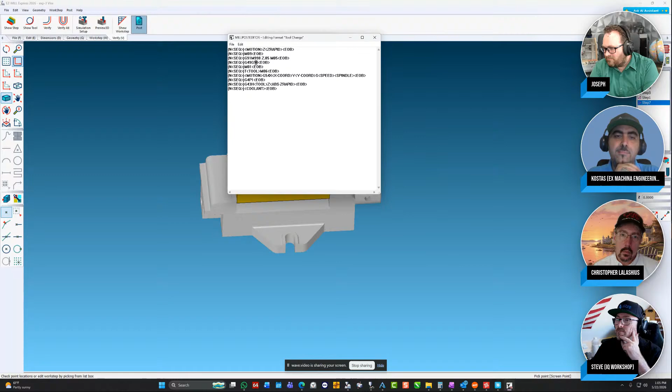Here, we're not seeing a Z issue, but if I go to the tool change format, you can see that we have a positive Z, this M998 is the tool retract. So we're taking that extra 50 thousandths. If I go to the end of the program, that'll be the other location, we're doing the same thing here. Now, had you not known, if you know nothing about post processors, the AI is there for you, where you can just go in here. There's an upload button. So we'll upload the post processor. There's our Tormach AI copy.

And I'm going to say to it, let's see, modify the post where M998 Z, what is it? I got to be exact here. 0.05 should change M998 to Z 0. Now let's see what AI does for us. Doesn't take it long at all.

I probably should have been more exact and said that I wanted that done in the tool change and the program end. But let's see what it does for us. Now, what it's going to do is take that old legacy code and change it over to WinBasic. It does that for us automatically.

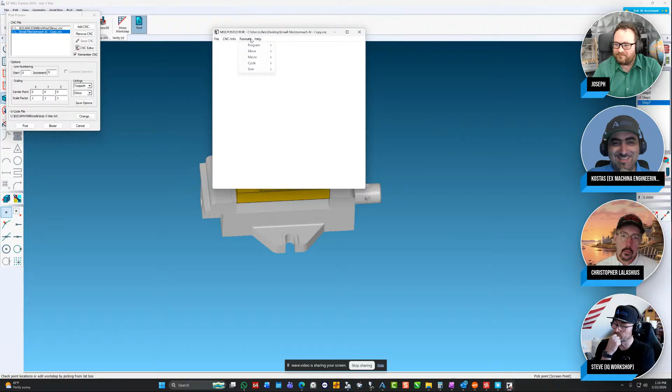WinBasic. So you can imagine trying to write all that code or copying from one post processor to the other. I mean, if you want to modify safety blocks, you have two people sharing the same post to make those changes that are suited for you. I mean, there you have it. You don't have to worry about making a phone call.

Yep. So Chris, can I just ask a question from a hobbyist perspective? Absolutely. So I'm running a GRBL compliant CNC machine, currently covered in what I affectionately like to call man glitter, sawdust. One of the things I have to do every time I run a job is run a G28.1. The reason I need to do that is if I don't, the machine plunges down to a specific depth and then tears off to the start of the job, which might actually be through the stock. So G28.1 just sets a safe travel position. Would I be able to use the function you've just demonstrated to add a G28.1 to all of my jobs so I don't have to do it manually?

Absolutely. You can tell it what kind of code to follow after. So let's say you had your safety block, you could put your safety block in there, and say I want on the next line, this is what I want to insert, the G28.1, and you can do that and tell it to say okay, I want to do it in tool changes, and I want to do it at the end of the program, and it'll go through just like it did.

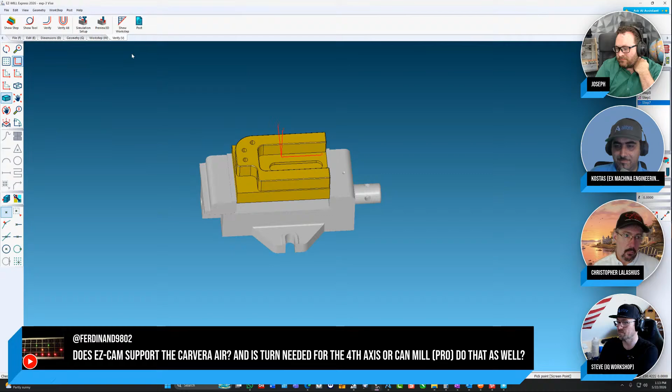Maybe if I step into it real quick here. Let's see, no, open. 4th axis, so here's an interesting example.

So you put this on a 4th axis, and while this is spinning, it's going to be moving in X, Y, and Z. Might take... okay, here we go. Maybe let's simulate that.

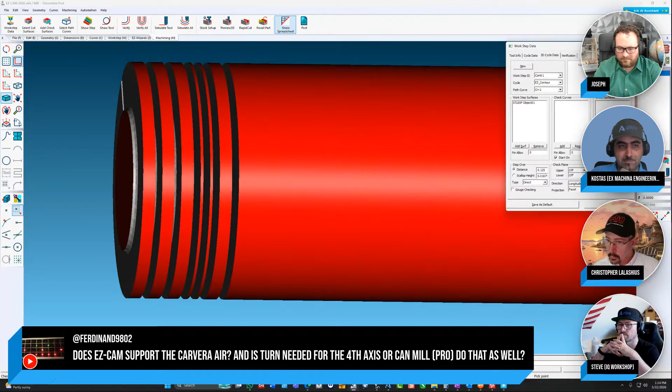Yeah, I keep getting an error. As it always happens with live, because nothing works right, of course. Doesn't it? Happens to me all the time. Right, yeah, why don't I come back to this? While you guys are talking about an Alibre question, I'll iron that out.

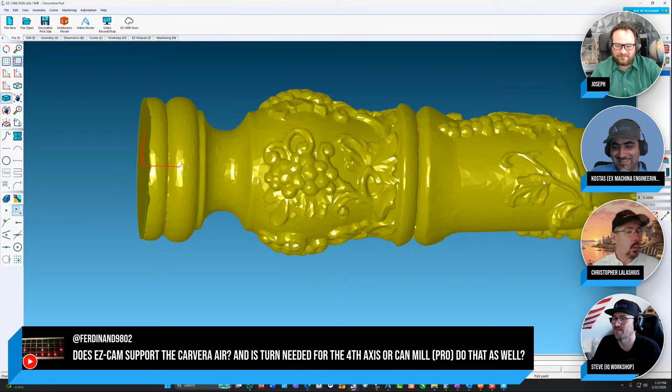We'll nail that, absolutely. Something that we've talked about with Alibre in the past is STEP and SAT files, and I don't know if I actually gave that the depth that I should have. So I think it's important to unpack why these are different formats and what a big difference it makes. When you have a model in your computer, no matter what parametric platform you are using, if you convert to STEP, there is a substantial change. The STEP says, I want to store all of the geometry or the shape of the file.

Your computer, on the other hand, your Alibre or whatever platform you're using, actually represents these surfaces using something called NURBS, or analytical surfaces. NURBS surfaces, imagine splines, point splines that you can make. In fact, I'll pull this up on my computer. NURBS is a really fun way to talk.

You think NURBS, kind of a funny word. But if we make a spline like this, I have all of these control points that determine the shape of the spline. Imagine those in 3 dimensions, and that is how organic geometry is represented. So your computer has a bunch of these in the background that you don't see that represents these surfaces.

When you convert to STEP, these splines are lost and just the shape of the surface is recorded. When you open it up in a new platform, the new platform reads the geometry and recreates these splines. It's a process called reparameterization. Sometimes, especially between different kernels, this reparameterization can cause tiny errors in edges and things like that, and that's where you can get some import errors.

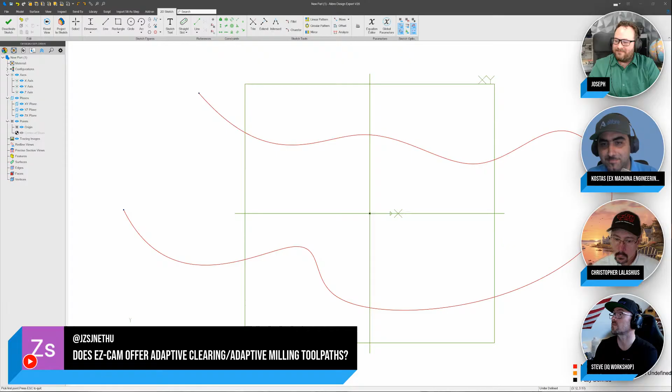Okay, can I just add a couple of things? First of all, I want to highlight this because it's a really quick answer. The answer is yes, it does - I've used it. The question was, does EZ-CAM have adaptive roughing and finishing, well, adaptive roughing, because that's only used for roughing. But yeah, it does have adaptive roughing. I just wanted to add to that.

So NURBS, it's not a slur for somebody who's just started playing the video game you love, right? It actually is initials for non-uniform rational B-splines. I think I got it.

Yep, and they were developed by Renault in France, right? And they're called Bezier curves because the mathematician that defined them mathematically for the first time was called, his last name was Bezier - Pierre Bezier or something. But the really funny thing is, Renault invented this, and the first car they designed using NURBS was the Renault 19. Now go on Google and find a picture of that car.

It's a square box. So I don't know why they went into all that trouble - a square box invented with NURB fillet curves. Yeah, well, yes, it does have a couple of fillets. That's very true, especially the 16 valve one, which is quite an exciting car to drive, but it still is a square box. So they went to all that trouble to design a slightly less square box. There you go, fun fact for you. I love it, I love it.

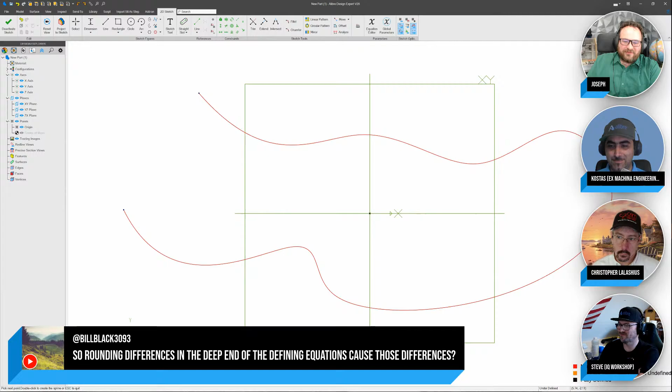That is one thing, yes absolutely. When you're dealing with NURBS, different kernels are going to define splines differently, so you can have the same geometry represented with very different looking splines depending on how the given computational kernel processes that. We think of them as geometry kernels, but their geometry is almost secondary when you think they're defining topology, maintaining consistency across different nodes, constraint graphs, geometric computations - all of that happens before the geometry, so it's almost secondary. There's a lot that can cause these errors. Another thing is when you go into surfacing, you have a patchwork of different individual faces being knitted together, so small rounding differences compound across these relationships sometimes. That's a big factor as well. Hopefully that's kind of an answer, and a lot of it depends on the specific case and situation.

Yeah, and look, NURBS is a really weird thing in mathematics. If you go into the math definition of it, it's a function where, if I remember correctly, the tangent to the curve at every point is defined by three control points: the one you're closest to, the previous one, and the next one. So it is a bit weird, and I imagine different geometric kernels have different commands and entire algorithms and strategies to decipher that and actually design the curve. So it's also a porting issue - when you want to take one set of commands that maybe ACIS uses and port it over to do the same thing with a different command set that Parasolid uses, that's another issue for translation problems.

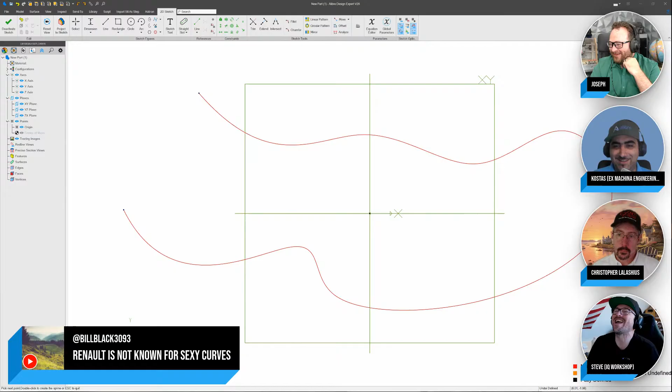Love it, yep I like that too. I think this one might be for you, Costas. Yeah, well, they're not known for sexy curves - they're known for being sexy around the curves because, come on, they're great cars, really fun cars to drive. And the good thing with Renaults when you drive them is you don't have to look at them on the outside, which is a major plus.

And we have another question. Oh, math is fun, got to throw that one in. It is, math is fun. Yep.

All right, this one is kind of after my own heart. Does EZ-CAM run AI locally or through an EZ-CAM server? It goes through the server. Perfect.

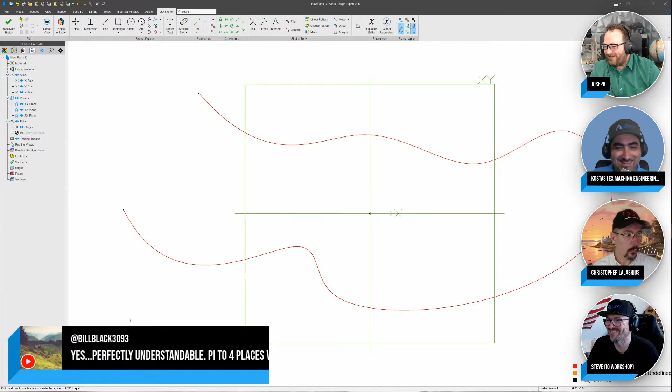Oh, we got a reply for Costas again. Yeah, he keeps going, but he's correct about that, right? My absolute favorite Renault was the Clio, the first Clio 16 valve and the Clio Williams, and they were amazing cars to drive. They were like the benchmark, but they were ugly, let's be honest, ugly cars but great to drive. The question is though, Costas, do they have the Renaults that we know in the US? This might just be a European thing, right? I don't think Renault is sold in the US. I don't think they're sold at all these days, right?

I'm pretty sure Citroen is out of the market as well. They had the large XMs, with the hydropneumatic suspension system and all that. But yeah, that's a great one. If you ever get the chance to drive one of these things, from the 80s, nothing, not even a Rolls Royce or a Bentley from 2026 rides like that car from the 80s. So if you get a chance to drive them, do so. But I don't think they're in the market in the US anymore, it's a European thing. Was that the Citroen CX? No, the XM, the larger one. The CX, XM, they've got the same suspension system, and the last car to have that was the Citroen Xantia 2. But the XM, with a large wheelbase, it was like a steamroller, right?

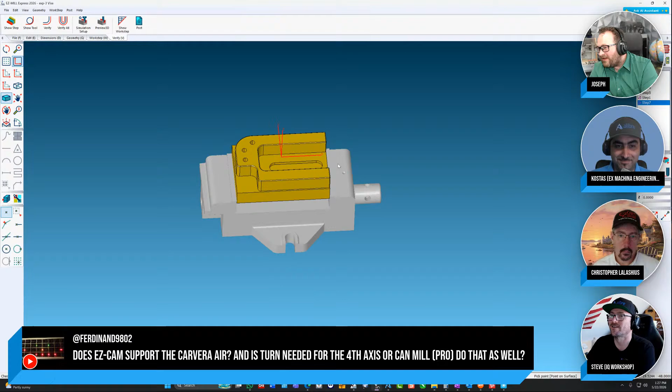Yep, now let's go to your screen, Chris. Sure. I saw back to that adaptive clearing question. It absolutely does do adaptive clearing. I don't know if you can show us maybe how to invoke adaptive clearing, what the benefits are, and why someone would care about that, which method. All right, let me.

Finally found that, I got a good example for us here. Okay, let's deactivate these, start fresh.

So we're going to pick this face. This is what we're going to use high-speed machining, the adaptive machining, for. I'll use a quarter-inch tool, the step over. So we modify the feed rates, and also our return passes stay down at the bottom of the part, so they're not rapiding. You're not getting all these rapid moves coming over to the next move. So we just skim the bottom enough where you're not going to have chips go underneath the end mill. Exactly.

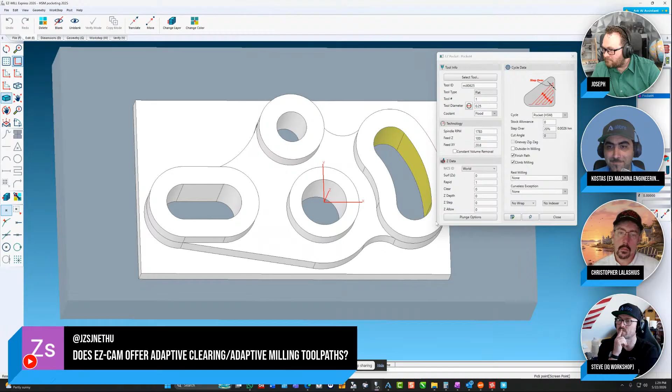Verify that. Now, if you noticed, I only clicked one face, and EasyCam automatically knew where the bosses were, so it adjusted for you. We start our toolpath outside of the stock, so let's bring that up again. EasyCam will start its machining from the outside, work its way in using arc segments to come into the corners. I'm going to use an oversized tool, let's make this 625. Verify again. Okay, so we're starting in, we're stopping where the tool can't fit.

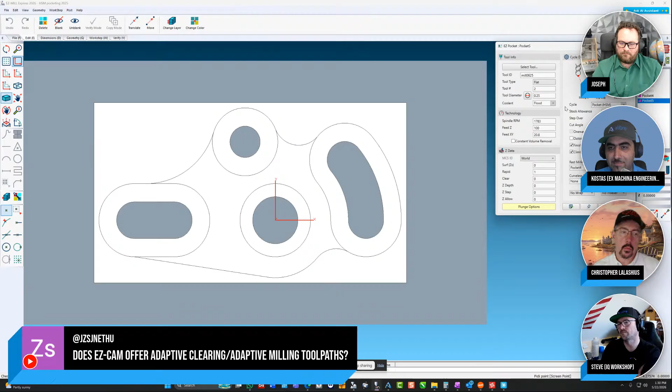Okay, so what we'll do with that is we'll go back in and make another operation, change our tool, change the size of our cutter, go into rest milling, and that was pocket 4. You can adjust the step over here, you can adjust your plunge options. Everything that you could do in the first operation, you can do in the second, and that's something we've just added, I think that's new in version 2026. So we'll verify. Yeah, EasyCam gives us a nice lead starting out where the material had been removed. Combine it all together.

And preview. Okay, so the change in color is a change in tool number. And this is showing us where the other tool left off, and we did our remachining with high-speed machining.

Any other questions? The reason you want to rough with what's become known in the industry as adaptive milling is you get a very stable chip load. Every time the end mill takes a cut, it cuts the exact same thing. That reduces, well, not vibration, but it keeps the vibration steady. It reduces resonance, where you might get into a vibration that resonates with your entire system and flexes the end mill, creates lines on the part, and most importantly, when your end mill resonates, it moves a little bit more than it normally does.

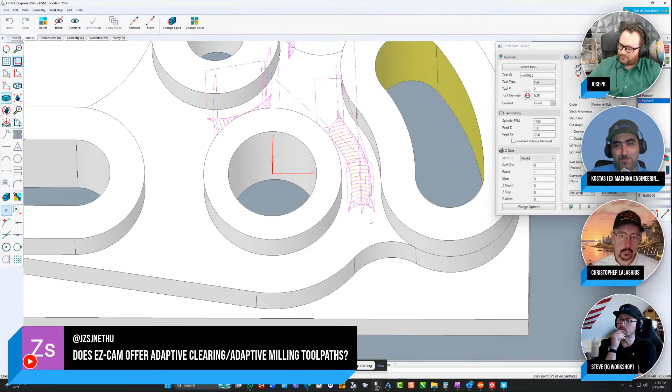And EasyCam does do, so what I like about EasyCam from the little I've used recently is what you just showed there, Chris. That it knows and enters the material from an area that has already been machined, or from the outside of the stock. That is really tricky to do in the CAM module for FreeCAD, for example. And I haven't used Fusion CAM for like 3 or 4 years, but Fusion was amazingly dim-witted about it. You were just roughing a square block, and it wanted to helix into the corner, helix into everything.

You don't... yeah, you can see here. I just also want to point out, when I was saying that it would start off of the rough material, so you're not going to damage your cutter, it actually has a lead in, and this is on the roughing. The outside tool path, that was on the rest machining, right? Yes. And here we're starting on the outside and working our way inward. Exactly.

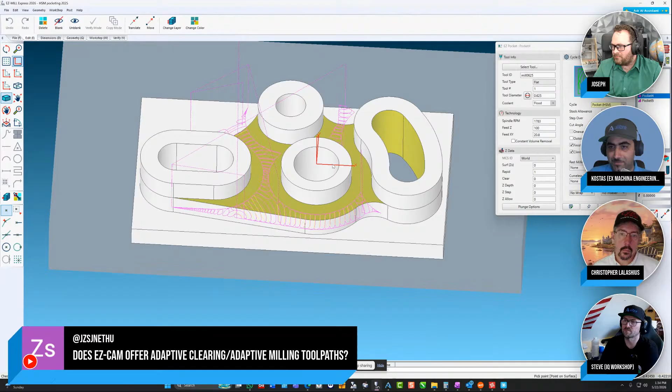So we're not damaging the cutter at all. We're not, and that's true with our 3D roughing too. It's just impressive where it realizes the material's been removed when it's going down for the next cut. That's important, man, I'm telling you. Because you can definitely helix into a part and start clearing it out, right? It's a definitely valid strategy, especially for an enclosed pocket, that's the only way to do it. But it does take a bit more out of your end mill, and if you don't have to do it, why do it? And if you need to spend like 15 minutes fumbling with options and settings just to get it to start in the correct spot, it becomes quite annoying quite quickly.

I just want to post this, and I just want to show you that we're adjusting the feed rates as well.

Can I just say something else about that? That is a feature that SolidCam heavily markets, and charges quite a bit of money for. I think the variable feed rate in the final CNC program, they charge more for that feature than the entire cost of the EasyCam license, just for that little option. And there you have EasyCam doing it out of the box, which is nice.

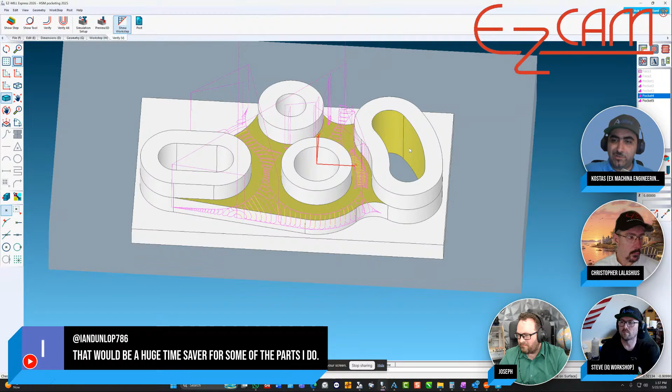So by having a constant engagement, right? Well, first of all, the entire idea is that you take the full depth of the cutter, because it's so gentle on the cutter. You take the full depth, and you just take a step over of between 10 and 20%.

I think Sandvik has a great video on chip thinning, and they say there that you either do 15%, sorry, 20 up to 25%, or over 75%, because those are the areas where you do chip thinning.

So if you're adaptive roughing a shallow area, you go over 75% step over, right? But the idea is you take your full depth, so you're not taking roughing steps, you do it in one step. And because you're taking a very steady cut with the bit and the side of the end mill, you can go a lot faster, right? Sometimes 2.5, 3 times faster.

So what you end up with is a strategy that is overall taking a smaller step over, but the overall strategy is a bit faster - not by a huge amount, but a bit faster. And now you can cut 3 times the part number with the same end mill. So you're saving a bit of time and saving massive tool wear.

That's real money, guys. That is real money right there. Carbide has spiked in price the last couple of months, so saving tool life is important - it's even more important now. Yeah, you reduce a lot of heat. Yeah, exactly, an awful lot of heat.

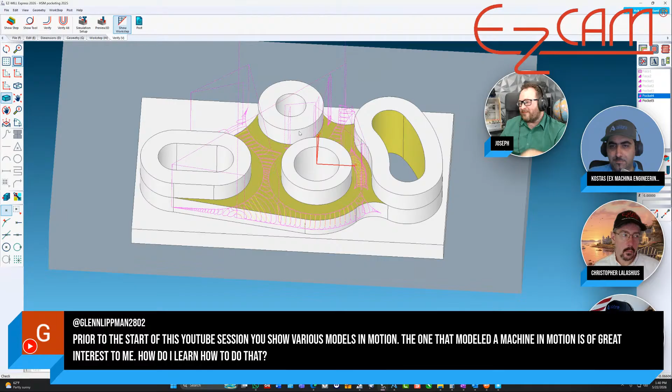So when we talk about models in motion, I'm interested to know, would you be using this more as a simulation analysis, or do you need an animation of the machine actually working? I think our answer might depend on what your needs are there. So let me know what you intend on doing, and I think I can get you a better answer - and Steve too. So follow up with us on that, and I want to get back to you with the best answer that I can.

And also another one for you, Chris: can I start with EZ-Mill Express and upgrade to EZ-Mill later if I need more advanced features?

Absolutely, absolutely. So you want to be within your 1 year support and maintenance on that, because if you let it lapse, to upgrade to the next level you have to purchase your maintenance to keep current. You pay the difference within the year, and if you skip a couple years, the maintenance goes up a couple hundred dollars. It's not like you have to buy the whole seat, the whole maintenance from the first year, second year, and so on.

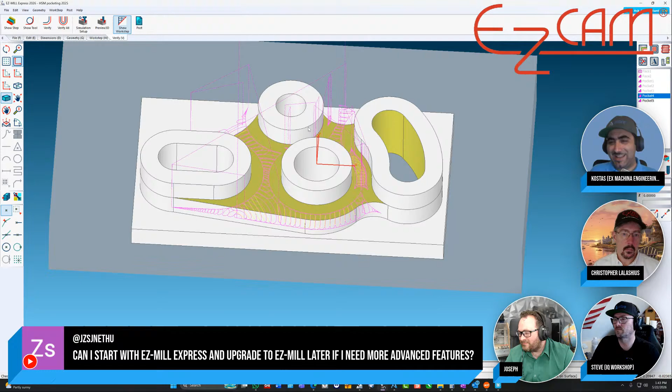But that's a major plus point for EZCAM, and it has great adaptive roughing. I wouldn't call it customer friendly, it's just logical for me. Everybody else is trying to gaslight you into thinking it's normal to charge like that. But anyway, it has that, plus the AI assistant. Great proposition in my book.

I'm going to have a little laugh because I came across this question: can you do a chamfer along a 3D line? I immediately thought, I've already got this perfect spline I just sketched for a previous question. So I switched to my screen and hurried to make something with a 3D profile, then said, let's do a chamfer along a 3D path. I bet they're asking Chris that question, not me. I was wondering about that too, but yeah, we do have an example of that. Let me call that up.

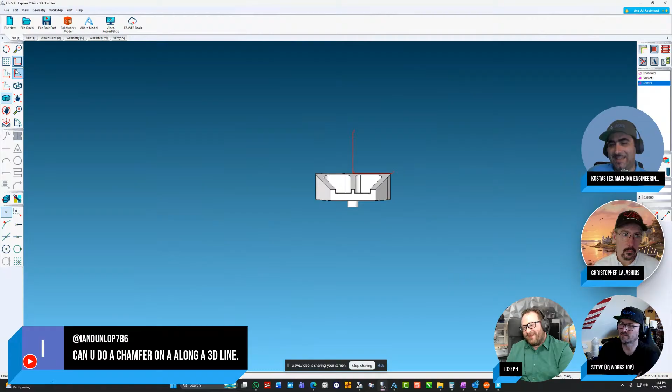Now we're going to go into contour. Set up my tool - I do have the ability to bring in a tool library. Right now I have a blank one; I was bringing in some other tools from another vendor, I think Kennametal is one of them. So you can import tools. I have a flat end mill, let's put in 45 degrees. Now I select my surfaces, 3D section, and verify. Preview. There you go.

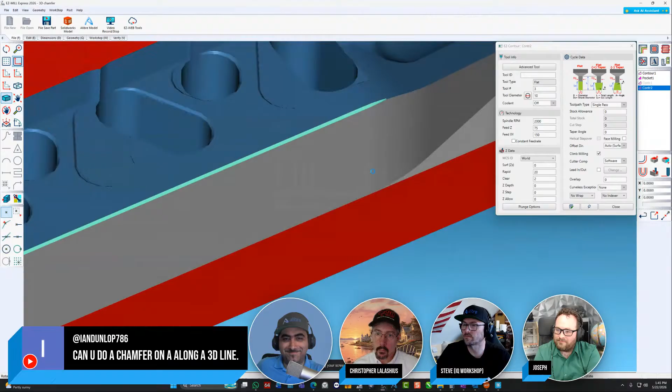So yeah, we can put that around. Let's go with 3D slot here, I think is what I need. We do a side view - you can see it's coming into a 3D cut right there.

Now Chris, this is also great for deburring parts. I just wanted to say, not just chamfers, but also for deburring parts on the machine. Super useful - that's a good point.

What kind of machines do you need for chamfers on 3D paths? Can you do it with something 3-axis, 4-axis, 5-axis? I mean, it's something like an EZ-Trak mill that has a powered Z - if you have a powered Z, you can do it. If you're standing there with a quill, 2-axis, you're not going to be able to do that. But anything with a powered Z can take care of that for you.

What's the best tooling for that? Would it be more of a ball end, or do some people use something else? You can use a ball end, you can use a bull nose. Some people use a spot drill - that's very common, you just grab a carbide spot drill or whatever and run it over it, especially for deburring. I did that. Here I have a 45 degree chamfer tool that I use, but you can always switch that over to a spot drill, changing this to a 90 degree tip angle.

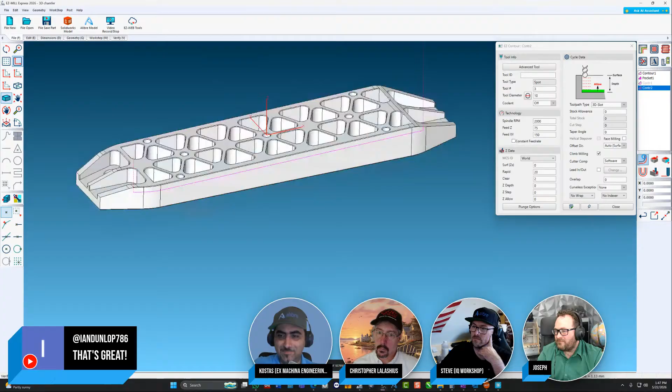Wow, lots of good options. Yeah, the diameter is wrong though. Yeah, okay. Let's see.

Spot drill. Diameter. There we go.

I like this question. Is it possible to use a 2D drawing as the basis for a simple 2.5D machining operation? 2D geometry only, like a DXF, I'm guessing. A lot of guys with plasma cutters and lasers, that's a real go-to, but you want to work with a solid model in most cases. Buy Alibre Atom, guys.

Do you have a Chris? Do you get a discount for Alibre Atom when you buy EZCAM? How does that work, do you bundle it? We're at a different... you guys bundle yours together, and that's what we do.

So Alibre Atom, when you buy, there's a machining option for Alibre Atom, and you get EZCAM and Alibre Atom with it. Alibre Atom is like a $200 purchase, and they often do discounts, and that's great. It's perfect for a machine shop, because most of the time, if you have a 3-axis or 4-axis mill, that mill cannot cut geometry that Alibre Atom cannot generate. So it's a perfect match, and you only pay like $200 for it.

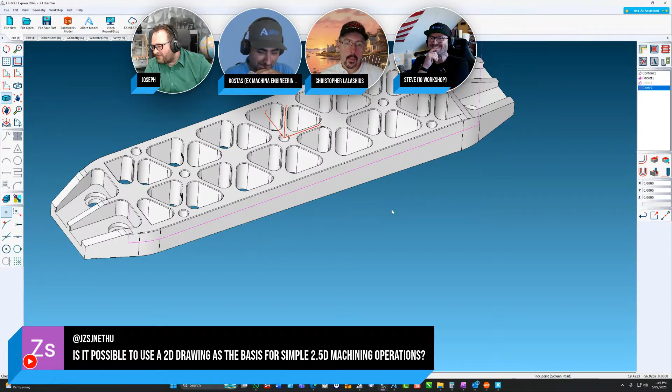I think this is a follow-up to that last one, so tell me if I'm wrong: can you draw surfaces to aid in the milling and constrain the areas that the cutter will cut? Within EZ-Mill Pro, you can create surfaces, so you could extend them.

We could even cap it. Let me see. Nice part. Cancel. What is that, like a printing roller? Yeah, it's like a rolling pin, sort of. Okay, let's see, cool. Patent taco shells.

Yeah. Don't go there, don't go there, Steve. I was going to say, isn't it... it's not Taco Tuesday. It's always Taco Friday over here, Chris.

There you go, let's see. So I guess in some cases you want to extend the surface. You might want to have some over-travel where the ball end mill's not rolling over the edge, but kind of flowing through it. Yeah.

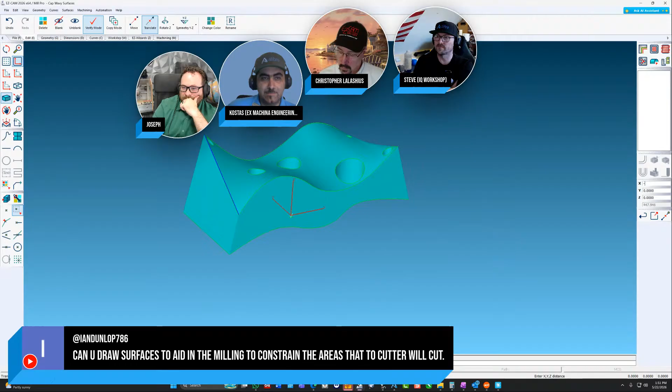We use a curve for that. We would just take and snap from one end to the other, maybe use edit and translate, X negative, I don't know, 1 inch, copy mode, select our curve. Then you just go in surfaces and create a ruled surface, select your boundaries. So you can do quick things like that in EZCAM where you don't necessarily have to take it over to Alibre and modify the model or come up with some kind of extension.

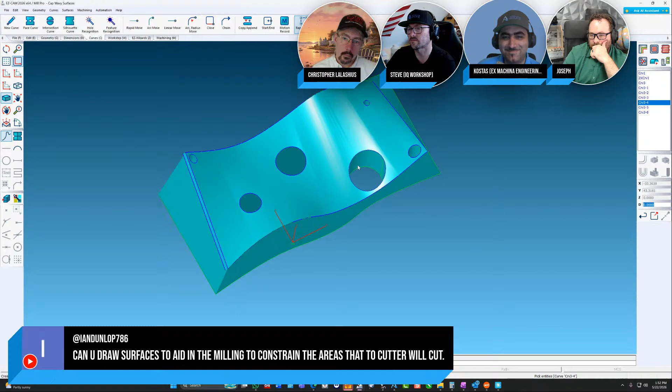Even with the holes, a lot of times people want to cap the holes just to smooth out the tool flow, and we could do that by going in and creating a face curve. Surfaces, standard, from plane arc, circular curve. I'm going to discriminate - when I click, I only want to click on a curve. There you go. You can see that we've patched it and it looks like a perfect match.

So yeah, you can do things like that. You can even use the geometry on the surface edges for chamfering. So we've got a reply: yep, that's exactly what I'm programming. So Chris, it looks like you hit the nail on the head there. Hey, once in a while we find bread.

There you go, I think Bill Black noticed our top comment. Oh man Steve, you shouldn't have. Come on, I'm getting hungry already.

So there's a really good question here, just throw this up on screen: does the software support creating and using custom cutting tools? Yes, we do.

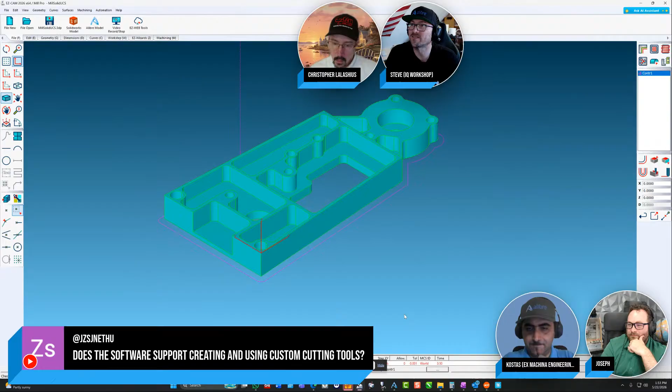Don't know how long it's going to take me to do this, I'll try to move through it pretty quick. Let's just say, let's make contour. Bear with me, let's see. Do I have one open? I do have one open. Okay, so Mill Pro - now it requires the Mill and the Mill Pro in order to make custom tools.

Now what I need to do is open EZCAM's library. Let's go on a C drive, EZCAMW, and we are working in 33. Switch over to all files. Tool holder, let's go with, I think that's inch, so we'll go with tool holder inch. You can see all the different... oh, those are tool holders. I want custom tools, sorry.

But still, that's impressive, and you can draw that in a 2D drawing and just bring it in and it reads all of those shapes. Exactly, yep. All right, so let's go back.

That is cool, inch tool geometry. There we go, here's one of our thread mills, single point thread mill. Here we have our center drill. So let's go down the end of the pile, let's go with new curve. Before I do, I'm going to set up my grid spacing, let's do something like 1/8 of an inch.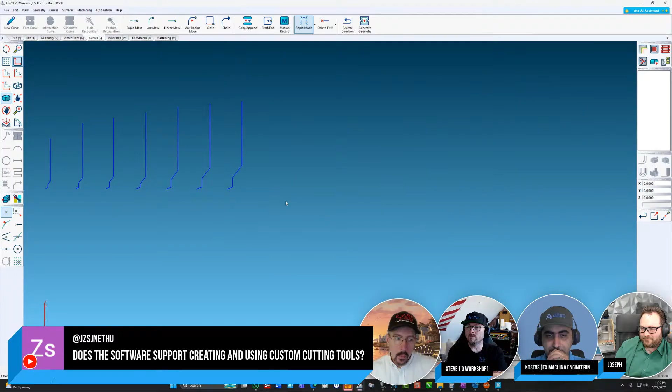Make a new curve, curve 14. Wait a minute, I want to rename that. We'll get back to that. Let's see, linear grid. We'll just do something like that. Did I hit? I'm not on zero, I want to move that up. Move from here, there. Okay, so that was curve 14.

There's a status bar down at the bottom, so that's the active curve. So I'm going to save my library. Can you show us the status bar again?

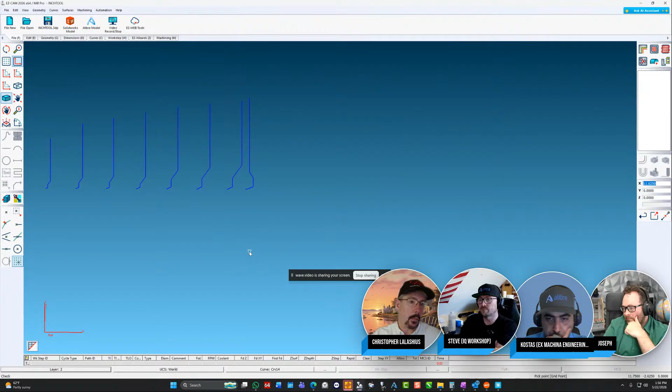I'm just moving us out of the way here. Okay, so down at the very bottom, we're on layer 1. So if we're working with different Alibre models, for example, you might want to click on layer 1 and change that over to layer 2 and then bring in your Alibre file. So now you are stacking them up and you can work with layers. We have a layer manager that allows you to hide, delete, or make copies of them. It's all tucked away up here.

I know I'm going into a different subject here, but man, it's just insane. You can hide them, you can show them, delete them, create other layers, add the models to the layers. So yeah, good organization. So now let's go into this one.

I've got to go to my tool library. There. Now we're coming up on an hour, so I don't think we're going to have any server issues, but

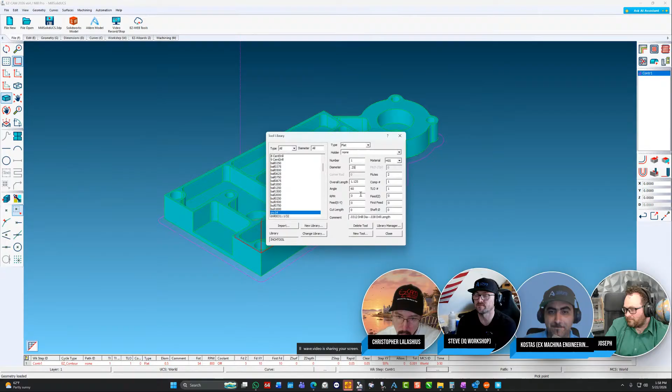You draw a curve representing your tool shape. You've got to make sure you name it accordingly. So let's go with a flat something end mill, readable. That's where it's getting the custom form. Angle zero. Close, save.

Go in here. Background, select. There you go. I hope it's not case sensitive.

Let's see, simulation. Slow the simulation down.

Turn off folders. The tool holder is huge. Yeah, the tool holder is huge, but the tool seems to work. Yeah. Yeah.

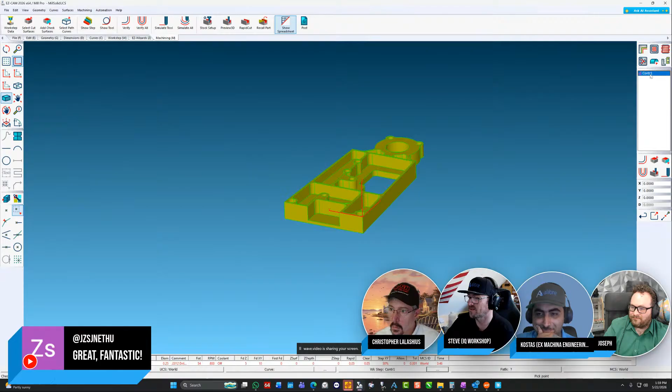I'm in, this is metric. I was wondering if that. Well, that's not the case.

Escape. Let's see, overall corner radius. 14.

Tool, all right, switch over to you. I'll get this, once in a while you end up running into something. I'm rushing around, there's something silly I'm doing here. Absolutely. So I think I don't think we'll have any server issues. The new, how hard could it be, or what could possibly go wrong, right?

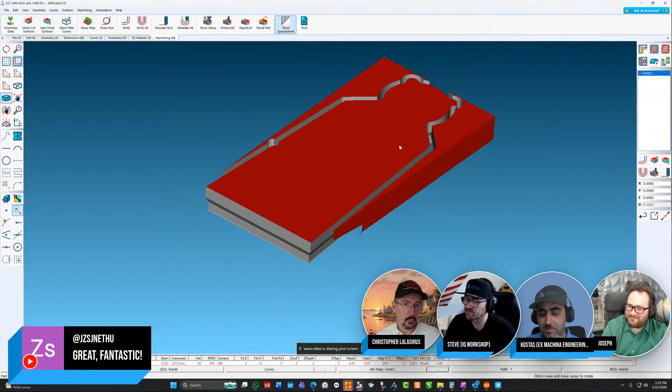When I had a job in a CNC machine shop, we used form tools for aluminum. It was a specific profile, a part with two ball bearings - a sliding door would ride on these things. You had to do a very specific profile and then put the ball bearings in, and it was just a form to a single pass.

So whenever you have a profile that is repeating along a path and you have a large production quantity, you do a form tool. No reason in playing with...

It's funny, I just want to see what a Z helical will do with this type of tool. We've added the Z helical so it spirals down like a corkscrew. We've added that to the Mill Express. Let's just take a look at that toolpath. Okay, that's cool. So let's make it a little steeper.

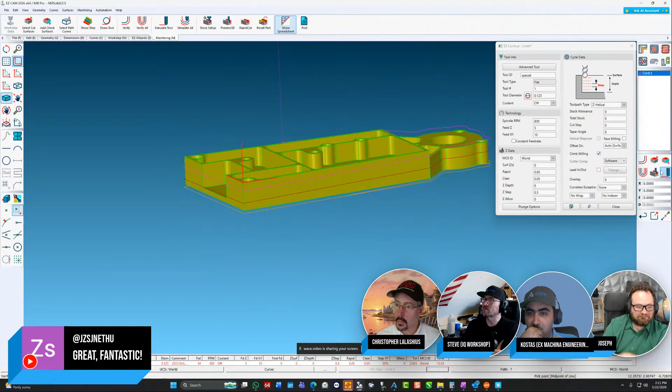I want to comment on that because I saw it when I was using EZCAM, and I really love that, and I want to add something after you're done, Chris. Let's just see what that looks like. Isn't that awesome?

Let's just change that back. I used to do the math in Excel and create that program manually for cutting key slots in very large shafts, like 5-inch, 6-inch, 8-inch shafts that you would put large gears on, with a very large key seat. I would get an end mill that's slightly wider than half the key slot width, and ramp it down - it would do the key seat a lot faster than just plunging it in and trying to hog out the material.

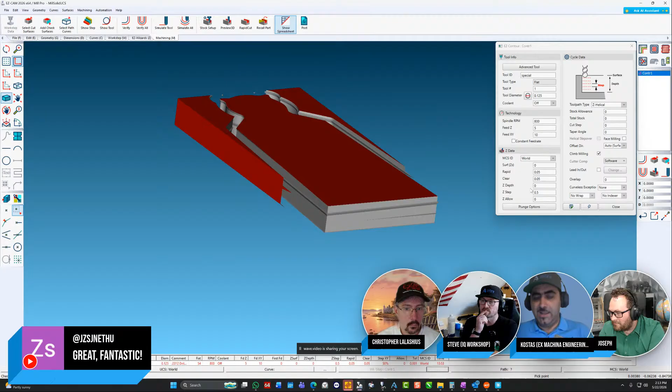What I wanted to say is, when you're doing that helical entry for an adaptive, so you have an enclosed pocket like we were discussing earlier, and you need to do a helical entry for the adaptive roughing - EZCAM allows you to choose the taper angle of that helix as you go in, right? Which is a lot more important than people think. Do I remember that correctly, Chris? So I'm gonna put that into play here for you.

So the key to high-speed machining is you want to go as deep as you can possibly go, and then step over. Maybe step over at 20%.

So to do that, you can see here we're plunging straight down and getting to the bottom. So what we do is we add some plunge options. If your plunge options don't work, let's say you're using a helix and it's too large, or it's starting in a corner, EZCAM will adjust and give you a zigzag down to depth, so you get some kind of a plunge into the material rather than going straight down. EZCAM adjusts for that automatically.

Before, it used to be plunge parameters aren't possible and you're done. You'd have to make adjustments, use a curve, redefine where your end mill is going to start. So EZCAM automatically gives you that zigzag where you just can't fit a helix in there any longer.

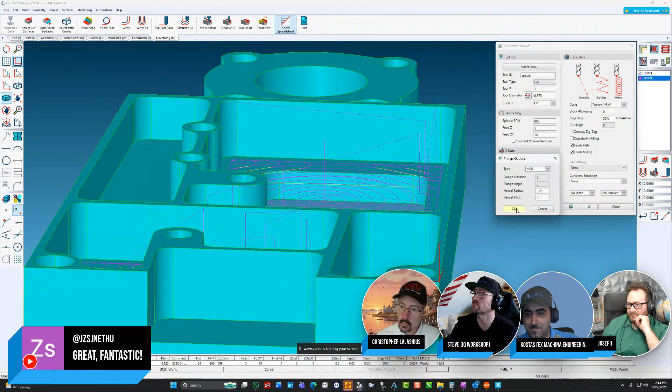So we'll do a helix, and let's say we go down every helical radius of a quarter inch. And the pitch, let's say every revolution goes a tenth of an inch deep. There we are, there you go.

That's cool, man, isn't it? That is so cool. You get to helix into your pocket with parameters that you select, and then you continue on with your adaptive. Exactly, yeah, that's cool.

I'm seeing, nice Joseph, your mic is pretty hot. Oh, is it? Let's see, what kind of noise is it, white noise? Something like that. Yep, a booming noise, basically. It's the mic's noise floor. Is that any better? Yes, it is better, it's not gone completely, but it is better. Oh darn it, yeah, I think my computer is really doing something here.

I'm seeing some other questions and wanted to respond to Glenn Lippman because he asked a long time ago. He's working on building large robotic automatic machinery, uses Keyshot to make it look real, and adding motion would be a game changer. I saw that Harold did respond with the most straightforward thing: if you buy Keyshot with Alibre, it's still possible, you can get animation, but you got to get the Pro license directly from Keyshot.

I'm going to switch to my screen here and pull up - I don't know if this is along the lines of what you might be looking for or not, but I did make my own animation inside of Alibre. Of course, you can crop out the UI here and have somewhat of a real looking animation, dynamic springs and all that.

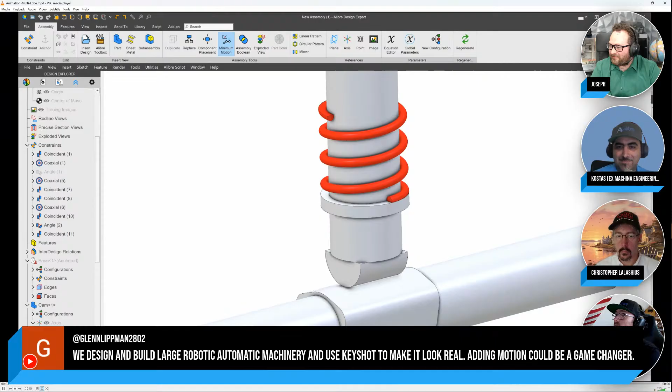So there are some things you can do inside of Alibre, and then there's free software as well. Blender is known for its animation and things like that. So there are options, but I think Harold really nailed it with the most straightforward answer. Shout out to our forum legend Harold, who we love having join us all the time as well.

Yep, I think, yeah, go ahead. Can I just say, Glenn Lippman, man after my own heart. I also do mechatronic design, basically that's my niche as well. So yeah, that's what I wanted to say.

Maybe you have a robotic simulation program like I've been using for years, Coppelia Robotics. It's not photorealistic, but in the simulation you can get a lot of data out of your entire system, and you can add the Alibre model as an STL. Then the rest of your robot or machine can just be a free body diagram, blocks interacting. But you can see in your simulation screen the STL from Alibre, and you can get amazing telemetry from this software. So if photorealistic is not a very hard spec, that's another way to do it.

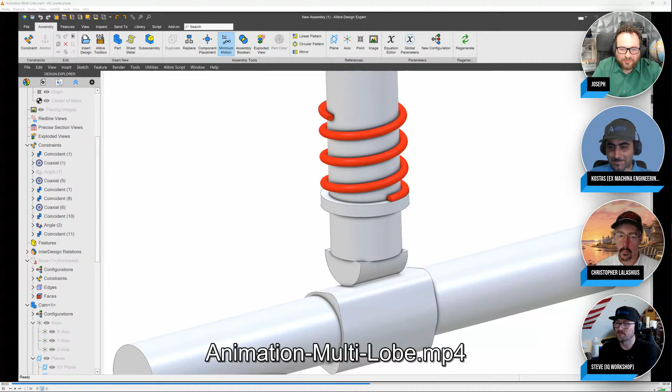All right, so I'm seeing a few other interesting comments. I think there's one for Chris, actually one for you, Steve: chips and queso first, particularly for our British friends, since there's such a difference between temperature profiles of Mexican and British foods.

So, I mean, Brits, we do like our spice, right? You've heard of the East India Company, right? There you go, I was going to bring that up too. British cuisine, curry on everything - I think we invented fusion cuisine. Other than a roast dinner, I don't think there's much that's our own. Well, the East India Company invented a lot more, like stock trading and a few other unsavory practices. But we can take our spice in the UK. No one ever says, 'Gee, this meat pie is spicy.' Is that true, Steve? Are they pretty bland, or do you get a spicy one?

Well, it depends on who made it, right? I do have family in London, and I try to visit when I can, and I can tell you, you can get any type of food you want, perfectly made - Greek cuisine, Persian, Indian. You can get anything. Let's be honest, you've seen Sweeney Todd, right? It's got cats in it, Steve. Of course I've seen it. Just watch what's in your meat pie.

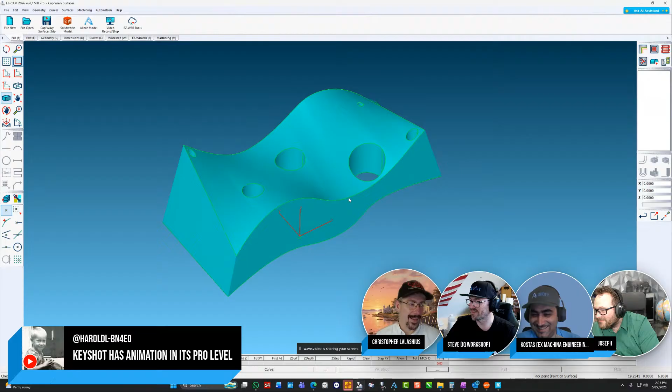So on a surface with holes like the one shown previously, is there any way to avoid holes during machining? As in other CAM software, BobCAD CAM has this feature. Oh, excellent, all right awesome. Glad you asked. All right, so let me just set this up here.

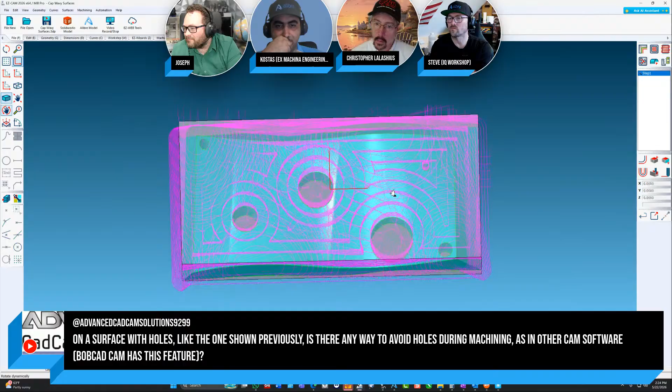We'll put our coordinate system in the center with some stock. If I go in and add, let's go with finish - actually, let's go with roughing and pocketing, flat end mill. Let's make it 6, see if it'll drop in the holes. I don't know the diameter off the top of my head. Ignore region size, so maybe I should get a dimension on that. But let's say we ignore regions up to 1 inch, and verify. Down in the lower left, we're showing our calculations going through. There it is - see, we're skipping over all the holes in that size. So let's change that.

Should start falling into it, see, you can see in here it's dropping down. But yeah, you can ignore regions.

So like if you had a slot, you didn't want the tool dropping into a slot. So what you'll do is define the length of the slot, if it's longer than the width or what have you. You want to give it the largest dimension to skip the feature.

Perfect. Can I just? Yeah, I saw that as well. But Fusion licensing, Fusion licensing - it was really horrible when they started changing the model, and they seemingly randomly started putting tools behind a second paywall. I mean, okay, you know what, mate? Just make the subscription more expensive and be done with it. Why do you need to do that? It was like a bad move.

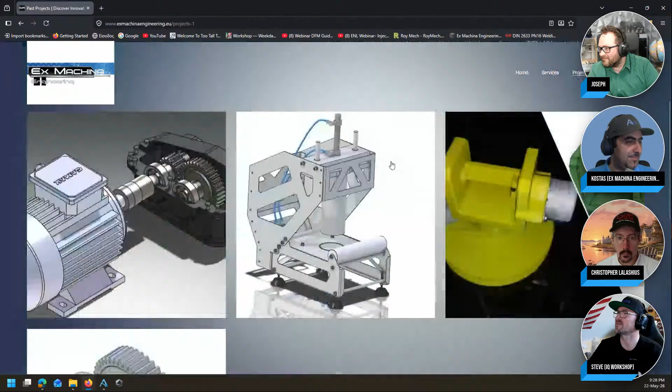And Chris, I'd love to get your thoughts. My neighbor uses Fusion. We trade parts via step file, which is usually adequate, and still misses the native support for his 5-axis CNC they took away years ago. I don't know much about Fusion CAM, but I'm guessing they no longer support 5-axis, or it's a paid thing or something. So certainly on the maker license back in the day, I think you could earn something like $50,000, or is it $100,000? Yeah, that was it. The startup license it was called back then. That's the one, and it was literally fully featured. And then 2019, they kind of tore up the licensing rulebook, made it the personal license, nerfed it to 10 active projects. They took away all but 3-axis CNC.

There's lots of features then that get behind the first paywall of subscription. Not all 3-axis, Steve - 3D finishing is still behind a paywall. Well, yeah, that's what you were referring to - that second paywall that they've got going on, right? So yeah, 3-axis machining is the limit in the personal license. Anything more than that, 4-axis, 5-axis is a subscription straight off the bat.

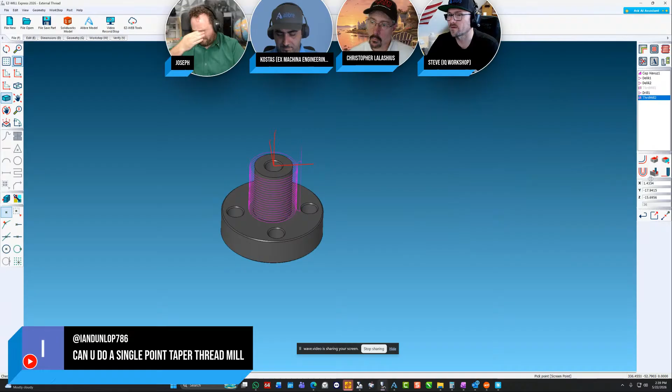Need my library, I have to go to... and sometimes if you don't install the software as administrator, you're going to run into an issue where it won't find the library. So you might want to reinstall the software as administrator, give the user administrative rights. You can take the rights away from the user after you've installed the software.

Let's go ahead. 12. Thread mill. Pitch, 5. 33. Depth. Preview. Wants to use my custom form tool.

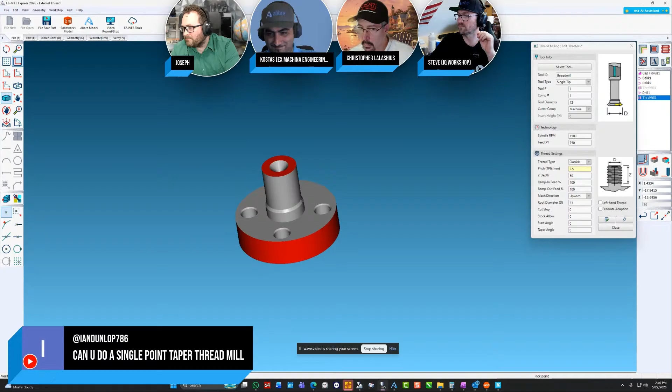I didn't have the holder set up for it, but that's what you saw, that blue holder floating away. How did I end up there again? But yeah, that's thread milling right there. Yep, oh fantastic. Yeah, I didn't set the holder up with the tool. It's not a big deal. And actually seeing the threads in simulation is always cool, let me tell you. That is really cool. Yep.

Yep. I'm not sure if this is a follow-up. Can CAM handle ATC? I know that is air traffic control, so can you control aircraft? Yes, of course, it is, of course, air changers. What do we want to control? The shortest distance, or maybe automatic tool changer makes sense. Can you change tools in this? I'm sure you can, oh absolutely. Oh absolutely, and even Chris just showed us. Yeah, just showed us the post, that you can actually input, have a post processor with specific commands that your machine needs for operating the tool changer. But yeah, go on, Chris.

Okay, so without a tool changer, typically what happens is the machine comes to a stop when it sees the difference in tool numbers. With an automatic tool changer, it just sees the tool number and it does the tool change for you. One step even further, if your machine supports it, you can have a next tool call. So not only does it go ahead, raise up, index, gives you the tool, it'll sit there for the next. EZCAM will give it the prompt to do the next tool change without the M6. The M6 does the tool change. So if I'm on tool 1, it'll take the tool. Then before it goes down, there's a next tool call, just T2. It'll automatically index the tool into the carousel, ready for it for when the tool has to return.

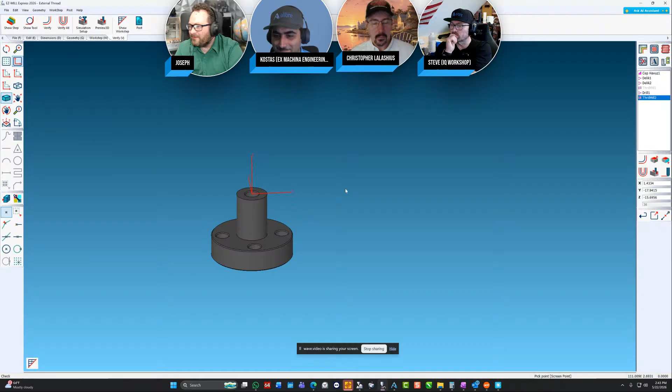JSZ asks if it's in metric or in inches. From what I saw, both. Is that correct, Chris? Yeah, I've been working in both units.

To find out which unit you're looking at, you go to the View menu and then Setup. Setup will tell you whether it's inch or metric. And if you wanted to switch, so this is in metric, we'll go and switch it to inch.

Then we'll come over here to Help, go to the toolbox, convert metric geometry to inch. So I just hit that. Now my model, if I was to measure a hole, it's 0.3346. So now it's in inches. Simple as that.

Matter of fact, if you asked AI that same exact question, how do I switch from inch to metric, metric to inch, it'll give you the whole explanation. It'll all be there for you.

That's so cool. Just on the AI piece, as a new user, if I came into the application and brought my model in, and there's a particular operation I want to do, can the AI educate me on how to do that properly? You know, I've been dying and chomping at the bit to show you this, guys.

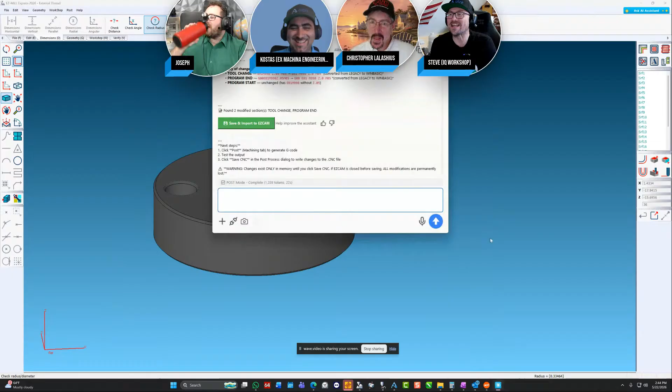That's why the newbie is on the panel, right? To ask the silly questions. There you go. Alright, Steve is not a newbie, guys, but yeah, let's go.

Let me just shut this down. It takes 3 minutes to do it, but it's worth showing you, and we'll just find some content to talk about while we're waiting for it to process. But let's go in here, new file.

So yeah, you know nothing about programming in EZCAM, and you want EZCAM to make this model for you. Give you all the toolpath. You can adjust the toolpath once it's made. Just go into the assistant.

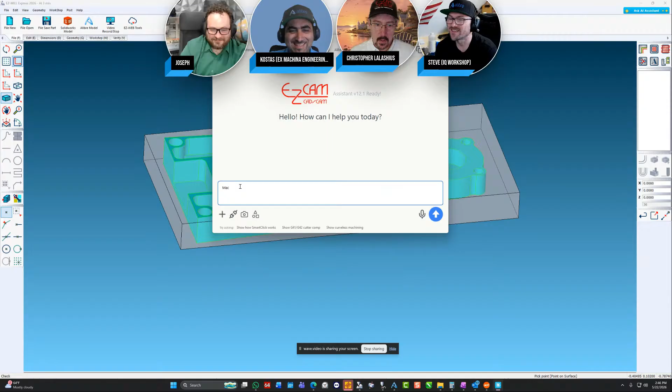Takes a second to load. Not 3 minutes though. Alright, so let's just say machine this part. Oh, that's cool.

So not only will it actually create a tutorial for you and walk you through step by step if you want to learn that way, but we have taken it one step further and give you the tool paths right inside of EZCAM.

AI is a very polarizing topic, and this actually gives you the best of both worlds. In the sense that if you came in and you don't really care too much to learn about things, you can ask it and it will program the toolpaths for you. Or if you want to increase your knowledge and skill, you can ask it to give you a tutorial and you learn which toolpaths you're choosing and why you might choose them and in what order.

That sounds really cool. I like that. Here we go, there's one feature inventory. So we'll let this cook for a minute and we'll come back to it. This is interesting, actually, this is pretty cool.

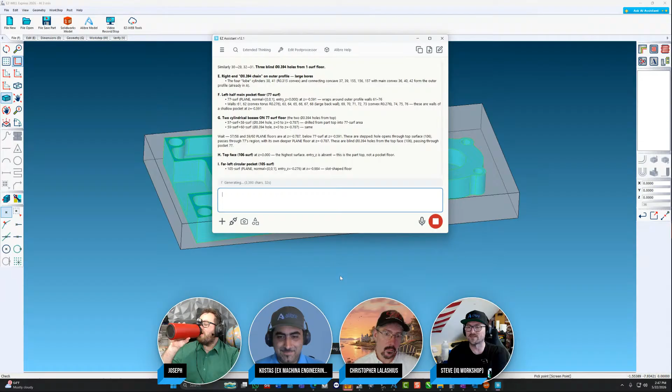So Kostas, you were saying before the stream that you'd been using EZCAM, and there's some new things you'd like to learn. It looks like if you use the AI agent, it's going to educate.

I did use the AI a little bit. I fully own the fact that I am a bit swamped with work for about 10 more days, because I need to be delivering projects 10 days from now. But then I really need to get into EZCAM a bit more, because it's so powerful.

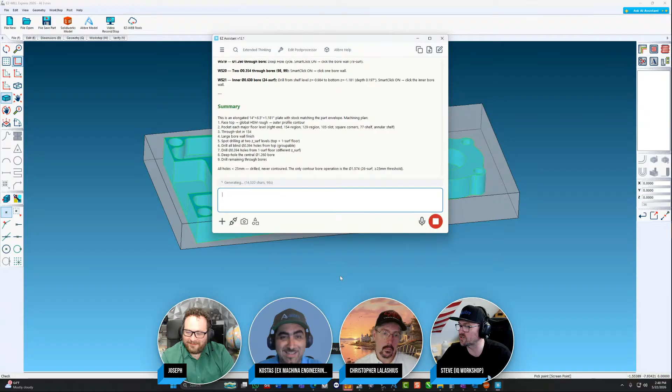I just love the fact that it has features that Fusion is charging more per yearly subscription than the entire perpetual license of EZCAM. I just love that, it's like, you know, slap it in the face of a huge corporation like that. God, it's just me. Sorry guys, I'm being annoying, I know, but sorry.

Well, while that's churning through it, there's a question here for Chris around EZCAM system for a post-processor, 3-axis mill. So this is a user from Brazil asking if it's compatible with various CNC controllers - I'm not even going to pronounce those because I will butcher most of those - Fanuc, Fagor, Heidenhain, and Mitsubishi.

Yeah, so I would get the last one, but no, we have post processors. All of those are popular machines, they're already in our inventory. You just contact us, or you even have the power of uploading an empty post processor and say, okay, create one for Fagor, for Heidenhain, what have you. We do have those machine controls in the library, so yeah, you're supported. So contact us.

Heidenhain is an important one because it's not ISO compatible G code. It's got an entire language by itself. Heidenhain controls are amazing in their capabilities and their precision, because Heidenhain usually does glass scales as standard.

There you go, TNC 530. And what was the other one mentioned? Mitsubishi.

Heidenhain is an amazing control, huge capabilities, but by not being standard ISO G code, you're heavily reliant on the post processor to get the full capabilities of it.

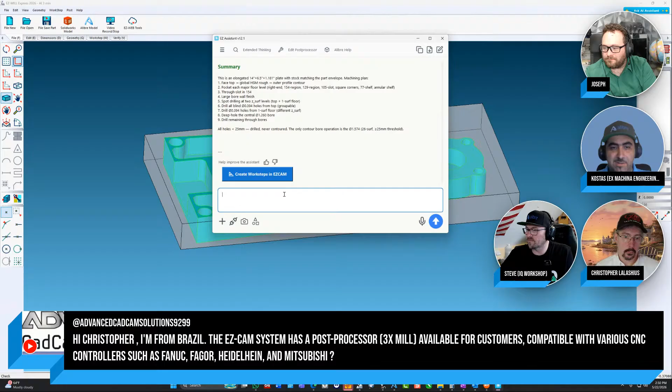I see that button there, create work steps in EZCAM, which was processed a while back. Time wise, we're killing it. So anyway, we just hit create work steps. Just building them. Wow. That might take a little while too.

So I don't know, Kostas, do you want to get to that global parameters question? Oh yeah, well that is working. If you can switch to my screen, let me find the comment first. It was cow tools. So the question is, when I create a new additional config, nothing changes on the screen, right?

So we have this part. This is basically a pipe flange, right? Very standard pipe flange. Let's say that we create some global parameters for it, for whatever reason. We want to drive that. Let's say that we want to drive this pipe flange along with the pipe that it is mated to, through the...

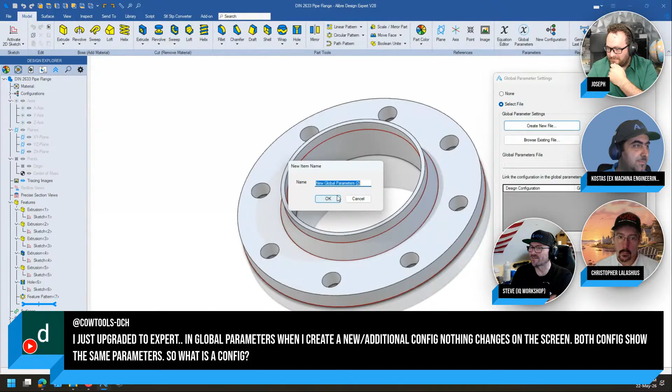I might have lost audio on you. No, I think we might have an audio interruption that Kostas is managing. Oh, there you go, am I back? Yep, okay. Oh come on, sorry guys, I think I just mixed things up a bit.

So there we are. Let's say now that I want to add a pipe OD, right? Let's say that this is 168.3. Is that the OD? It is, isn't it? I think that's the OD. So that's the 6-inch NPS pipe. And let's say that we want to call wall thickness, something like this.

Okay, so now when I save this, I need to save it somewhere. Where am I going to save it now? Let's save it here. Okay. So when I save this now and I update the design, when I go back into my equation editor inside the part, you will see that I have my pipe OD just came in.

Oh wait, it's not that, isn't it? Global parameters, oh man, live issues. I didn't link the global parameter file. So now I need to browse for the existing file. And there it is.

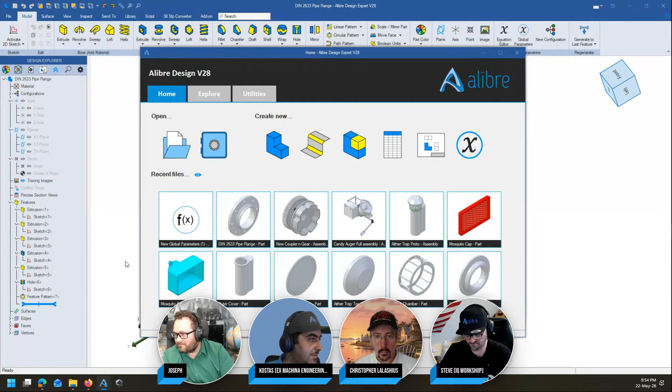And now I should have the global parameters in, right? I have a name conflict, doesn't matter, this is just an example. So when you go over there and you open that file, you can see that we've got configurations here. So configurations are available in the global parameters files as well.

And when you make a new configuration, now config2 is active and config1 is inactive, and I can switch between them. The whole deal is that, let's say that I want a smaller schedule pipe, right? So there you go, I switch between the configs. Let's save this, let's update.

So we're in here now. Let's see our global parameters only. We're still at the original value, but if I go in my global parameters here, now I have a drop down here. So now I can control which configuration of global parameters is going to get pulled in. And now I've got my different value there, right? So that's how the configurations in global parameters work.

And if you're interested, you also have part configurations, which give you a lot more flexibility. The idea here is you click on the thing that you want to be variable between configurations. So if I click on feature suppression, now I can have some features suppressed in one configuration and active in the other. If I click on parameter values, now I can have different parameter values for all of the features.

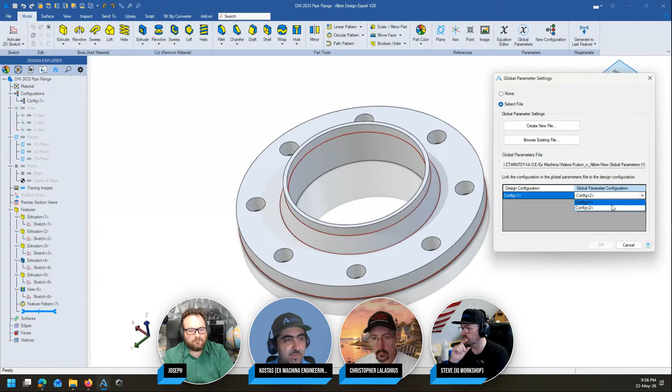you need to select it through here. Files linked to the same global parameter file can have different configurations selected, even though they are linked to the same global parameters file. So that's a bit more variability and options there.

But you need to select it through here before you can see the values in your next configuration. If it's only about one part, or even a couple of parts, consider top-down design, where you reference one design to drive the other one, and make full use of part configurations before you dive into the global parameters configurations. That's my way of thinking about it. I hope it helped. If I didn't answer it, please let me know and I'll do one more.

Love that demonstration, Kostas, for doing that on the fly. That was like a rehearsed video. A live curse hit me, but there you go. Very nice work. I'm going to switch to mine here.

I'm seeing a really good question. I've got Alibre Design Professional. Last week I asked about how to save a 2D drawing as a DXF. In my export options, I do not have the option to export to DXF. The export options I have are STEP, STL, IGES, SAT, Parasolid, JT, ZPR, and OBJ.

So I pulled up a 3D model here that perhaps I'd like to make a DXF out of. When I go to export this, indeed - sorry for that - we're only seeing 3D formats.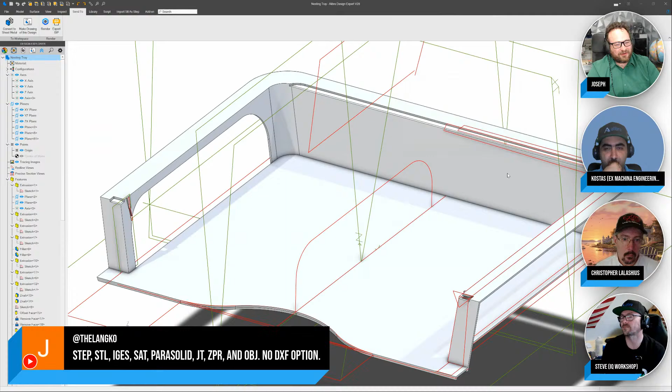That's because I'm in the 3D modeling interface. So what I can do is make a drawing of this design, and this is where we can really go into the 2D environment. As I send this over to the 2D environment, and I'll move my window over, from the 2D drawing environment, now we're looking at what would represent much more something like DXF.

We can say File, Export, and that is where our DWG, DXF and PDF options are for export. So let me know if that answers your question - simply send to a 2D drawing first, and you should be able to see that showing up.

Can I also add to that, Kostas? I just want to add that sometimes the nomenclature gets a bit conflated and confused, especially if you're just coming into parametric CAD. If you want to save a 2D sketch that you made in the 3D environment into DXF, you need an intermediate step - you save it as an SVG.

And then I highly suggest you download Inkscape, which is open source, free, hugely powerful. That software can open an SVG and immediately resave it as a DXF. So that's the workflow if you want to have a 2D sketch from your 3D environment go directly into a DXF without making a drawing of the entire part.

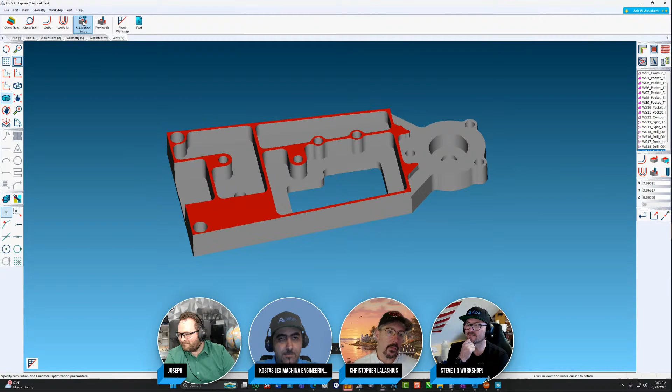Do I trust AI? How do I know I'm not going to have a problem with what I put out at the machine? So what you could do is go to the simulation setup, and we have what they call create uncut solids. So if I execute that...

Anything green has been cut to size, so you are going to cut most of this part to size. The remainder has to be, the red is stock, yellow would be a gouge. If I messed up, I would have to correct that.

And to find out which operation did what, you just double click on it and it pulls up the operation. I love that one, I like the visual breakdown, because at a glance you can see problems right out of the gates, and you just double click on the problem and it pulls up the operation. I mean, come on, you're absolutely correct, that's huge.

So then you just step it through, you take baby steps. You can just go in and deactivate, just deactivate. And still, that was... oh cool, that's the facing. Yeah, sure. Then you just activate them.

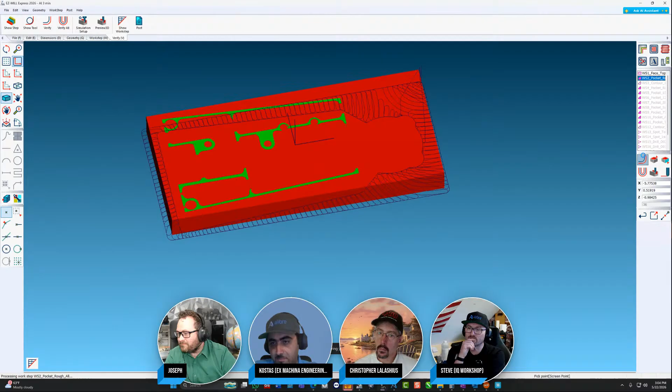It's cool because that was relatively quick. I mean, if you're programming step by step yourself, you wouldn't... if you were really proficient, you might do it in about the same time, you wouldn't be that much faster on your own. And to give you something like that in that amount of time, and then you just need to correct a couple of simulations and strategies, that might be completely worth it as a workflow.

I'm really impressed by how close it got, like first time out.

Bill Black is putting the heat on. Buy a seat, get a cap. Plus a taco in the mail. Ghost pepper. Ghost pepper. Ghost pepper. Ghost pepper. There you go.

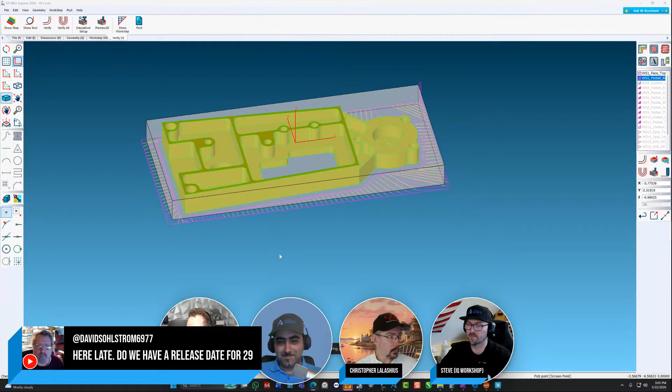I want to get to this one. Do we have a release date for 29? Oh yeah, glad you asked. So there's no promises because this is a very quality intensive process, we're not going to release something if we find any issues with it. So no promises, but maybe I won't make anyone upset if I say perhaps Wednesday. We'll see, no promises, but that is a pretty strong target.

I think there's a thread in the forum that mentions it. Yeah, perfect. Cool, Cow Tools, glad I helped on that one.

Joseph, is there a cost to switch from regular Alibre license to offline? Yes, it's a one-time cost, it's a one-time $200 upgrade. Contact our sales guys because they can run circles around me with anything licensing. One caveat is I think it's difficult or not designed to be switched around from machine to machine, so know that going in. I don't know the exact details around that, but yep.

So regular Alibre licenses, it's either 14 or 30 days that it will just do a quick ping to check if it's active. Otherwise regular licenses are offline. Offline licenses specifically, I think, go a year, so only need to connect once a year for things to work out. Okay, cool, worked out for Cow Tools, glad to know, thank you.

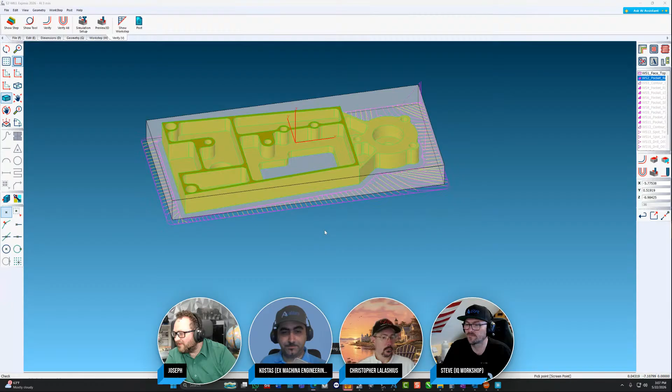Cool, this is an important one. Is there any plan for future versions of Alibre? I'll switch to this.

Designed to open and edit STL files. Is there a demand for this? And there is a demand for this in reverse engineering, as I need to edit and correct meshes obtained from a 3D scanner. This is a big topic, and I'm glad you asked.

This is really high up on priorities, and I can say that there's now a pretty good proof of concept in Alibre, if that gives any indicator. This is definitely not a topic being ignored. Stay tuned, because I think there's going to be some future updates on that very topic.

I would love to see something in this space where you can bring an STL in and simplify the geometry so that you don't have all the triangles, and then you can edit it as if it was like a solid.

I know Fusion's got that, and it's behind a paywall and potentially behind a second paywall, from what I'm hearing. So if it's something that's in Alibre, that's going to be pretty epic.

What Fusion does is you can take a triangulated STL, which is the standard STL, and turn it into... I forgot the actual name, but it's a quadratic surface - a surface with 4 points and curvature instead of flat triangles, and that is what you then can turn into a solid. The bottom line is, it's like smoothing the triangulated pointy STL out, right?

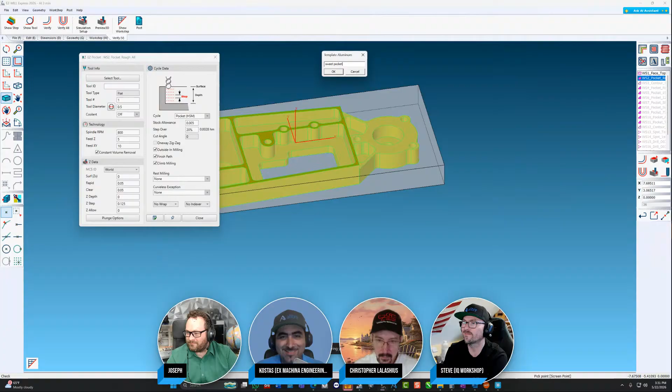And I can call this whatever I want. I don't know, Sweet Pocket. Yeah, okay, there you go. I'm going to sit right, okay. Is that like a hot pocket? Well, a taco, or a taco.

Let's see, I just want to see. Okay, so that was cutting the outside of the part. Now I want to use that same strategy, that same tool, and I'm going to go in and pick my Sweet Pocket, select an area, my step over, my finish allowance, step down. Everything is being used just as it works with that setup, that part. I'm going to throw other parts on there, they might have different features, but I'm not trying to finagle with the speeds and feeds that come from here. These are all your standard, came out of the Machinery's Handbook, came from different carbide resellers. You pick your material, so it's a template. It gives you an idea of what it's going to take for a high speed or a carbide.

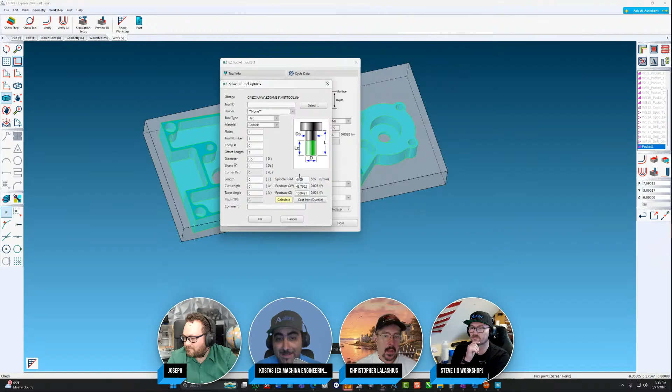We all have to start somewhere, but once we get where we want to be, you're going to want to start using templates. Love it, that's going to be invaluable. Thank you, yeah, for sure.

This is probably a pretty good follow-up: is there a metric tool library available? Yes, there is. Let's see, so if I were to switch over, let me see if I got a metric part just to... So yep, tool diameter 15. That cannot be inches. No, 15-inch straight. Yeah, you can do the same thing, we have inch and metric tool templates.

Yeah, it's a molding machine, isn't it? A mold cutter. It's... or a tunnel boring machine or something. A little tunnel boring machine, like. There you go.

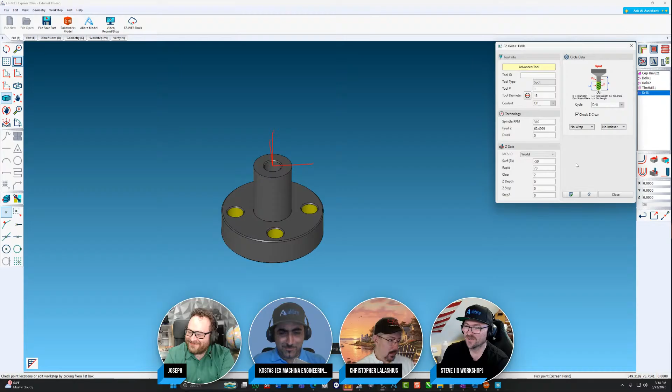But yeah, if you're wondering who that pretty face is. Face only a mother could love. I thought I was the pretty face of the stream, but no. Well, I thought we all fit the hat. Hey, come on, guys, I've had quite a few compliments lately. I've been told I got a face for radio and a voice for print. There you go. So your reply to that is, so you're saying I have a chance? You're saying I'm good, we've got the skills for live stream. There you go.